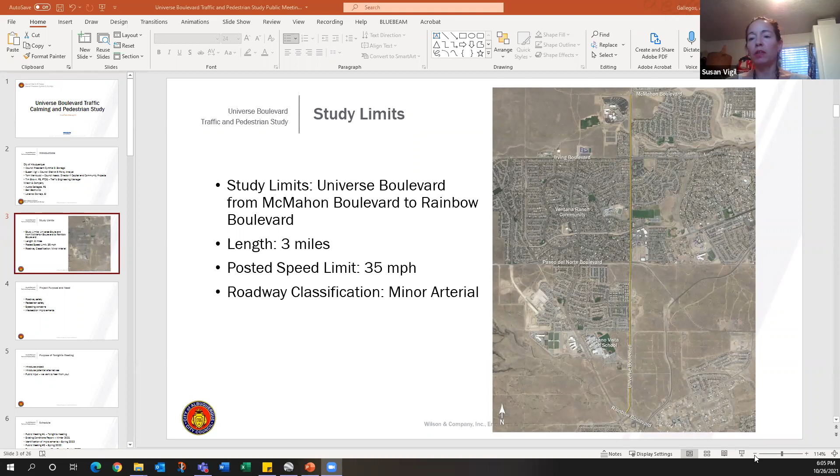I was just going to add that the councilor has been working in this area for her whole term so far, trying to find the right solutions and working with the communities, and so a couple of things have come about, but I'm sure that the engineering team from Wilson and Company will fine tune any solutions. So thank you all.

Right, thank you, Susan. The presentation that we have for you tonight is Universe Boulevard, and it is a traffic calming and pedestrian safety study. The limits are from McMahon to the north to Rainbow to the south, and it's about 3 miles long. The posted speed limit in this area is 35 miles per hour, and it is a minor arterial. One thing I do want to note is that the intersection of Paseo del Norte will not be studied as part of this study, because it is actually currently under a design project. So that's actually being studied as part of that project.

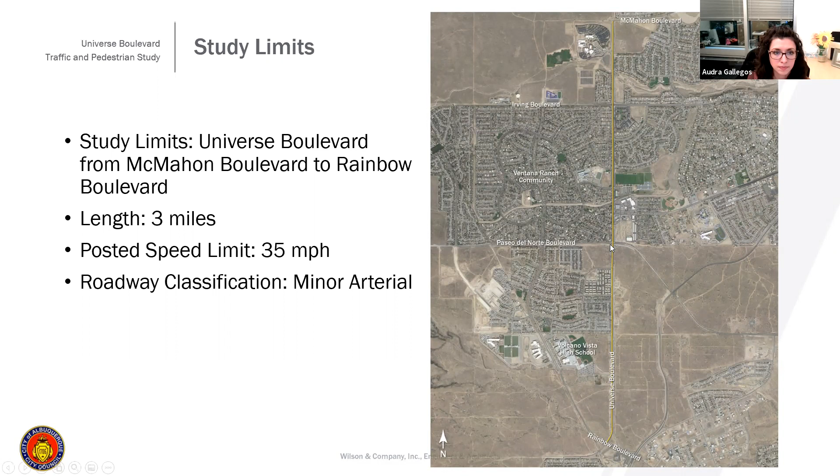So the project purpose and need is roadway and pedestrian safety. There are various speeding concerns, and then we're also going to look at some intersection improvements. The purpose of tonight's meeting is to introduce the project to everyone and any potential alternatives. But the main reason we're having this public meeting is because we want to hear from you all. We do want your input and some of your feedback.

The schedule for the study is public meeting number 1, that's tonight's meeting. We're going to start working on the existing conditions report, which we will be submitting this winter. And then from there, we'll move on to the identification of improvements, looking at any of the potential improvements and analyzing how they operate. We will have a second public meeting in the spring, where we'll present how these alternatives were analyzed. Once we get your feedback, we will provide recommendations and a final report.

So moving on to existing conditions, the section of Universe north of Paseo is a 4-lane section. There's 2 lanes in each direction with a raised median dividing the lanes. There's a sidewalk on the west side and a multi-use path on the east side.

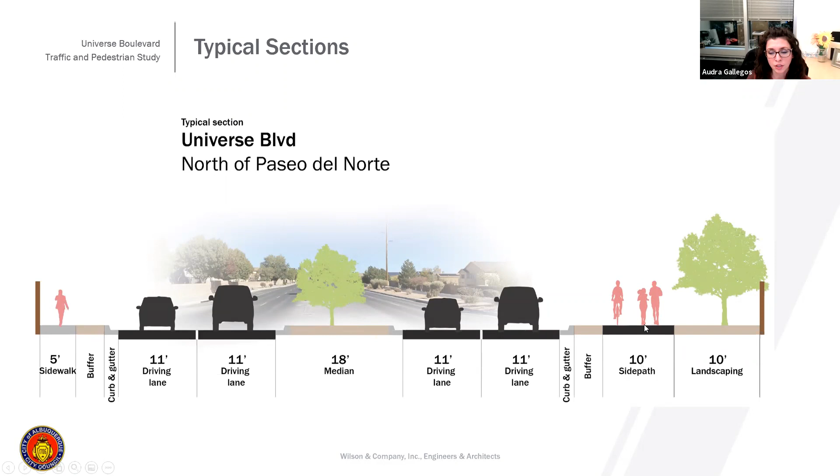South of Paseo, Universe is 2 lanes, 1 lane in each direction, and it's not divided. There's sidewalk on the west side, there's also a bike lane, and then some curb and gutter. And then south of Woodmont, the sidewalk and curb and gutter goes away.

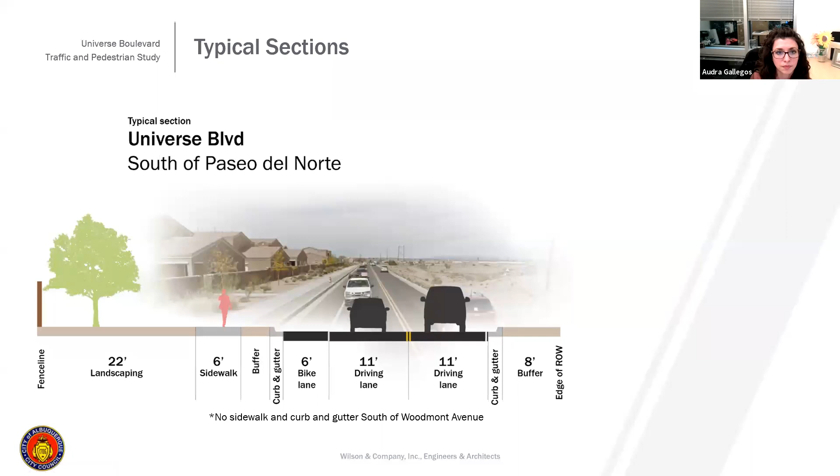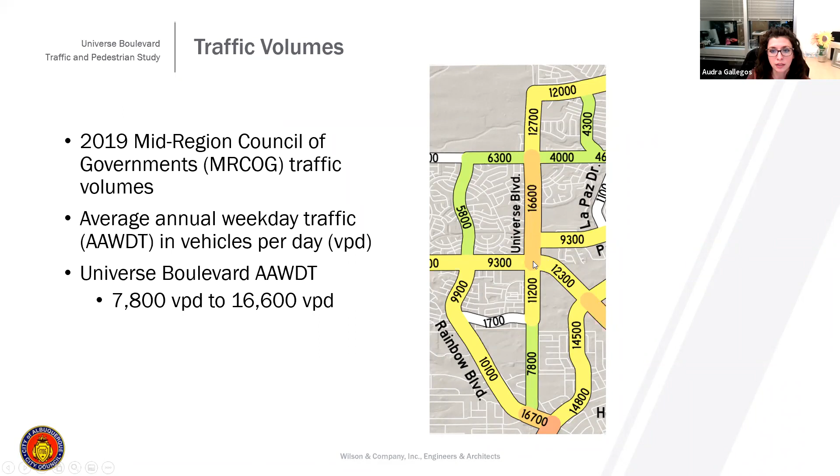So the Mid-Region Council of Governments, they collect traffic volumes throughout the region in Albuquerque. This map shows the average annual weekday traffic volumes, in vehicles per day. Universe ranges from 7,800 vehicles per day near Rainbow, up to 16,600 vehicles per day between Paseo and Irving.

And then I'm going to go through some potential alternatives. I just want to note that these haven't been analyzed yet, and that's the next step we're going to move forward on.

Roundabouts also improve intersection operations. Some of the cons of roundabouts are they're expensive, and they have a larger footprint, so they may require additional right-of-way at those intersections.

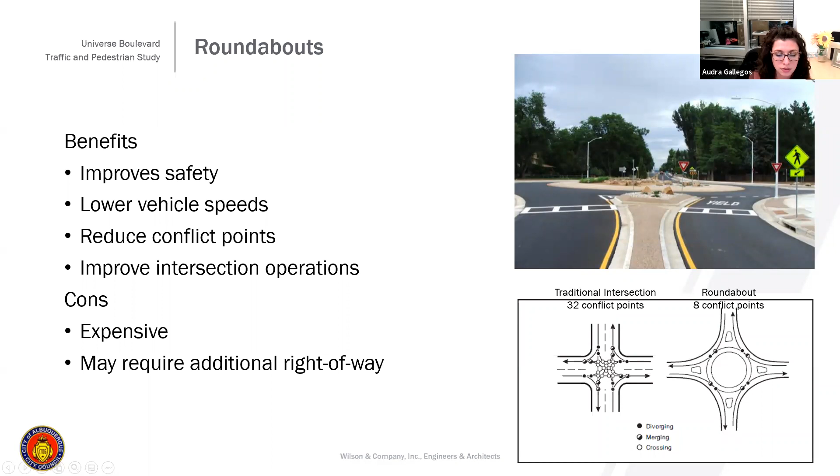So there's 3 intersections we're looking at analyzing. The first one is McMahon to the north, Irving, and Ventana Road. So we'll analyze what a roundabout would look like at these intersections and how they would operate.

The next thing we wanted to look at is possibly adding left turn arrows at signals. There's two types of left turn arrows. There's a protected left turn, where you can only turn left on a green arrow. And then there's a protected-permissive left turn, similar to what you see at Paradise, where you can turn left when the arrow is green, or turn left when you yield to oncoming traffic with just a green light.

These will look at FHWA guidelines to determine if the left turn arrows are warranted. We're looking at 3 locations for these warrants: the first is at the signal of Irving, the next is Ventana Village, and the last is at the Rainbow intersection.

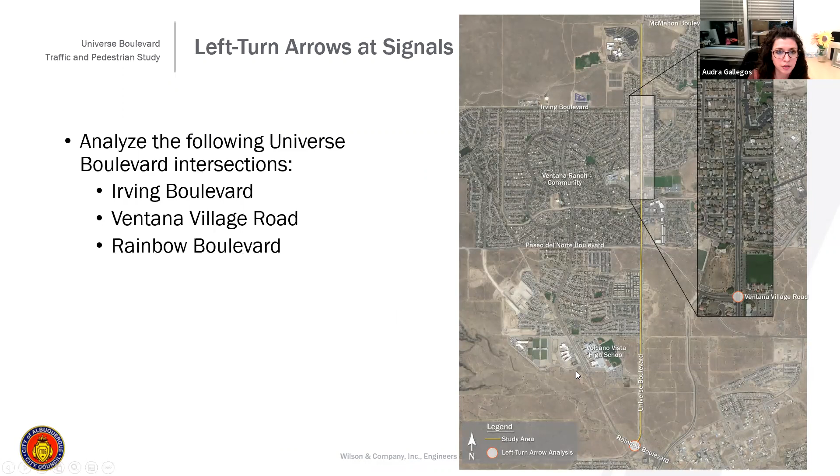The next thing we wanted to look at is an all-way stop warrant at the intersection of Ventana Road and Country Knoll Court. There was an all-way stop here previously, before the Irving signal was installed, but once that signal got installed, this 4-way stop got taken out. So we're going to look at warrants to see if it would be warranted to put it back in. These follow FHWA guidelines, and look at the volumes at this intersection and the crashes that have occurred there.

Recently, Council District 5 funded the installation of flashing intersection beacons. They were installed within the last couple of weeks, so many of you have probably already seen them, on Universe. When a vehicle enters Universe from Ventana Road or Country Knoll, this triggers those flashing beacons to start flashing, so cars approaching the intersection realize there's a potential of cars crossing on Ventana or Country Knoll Court.

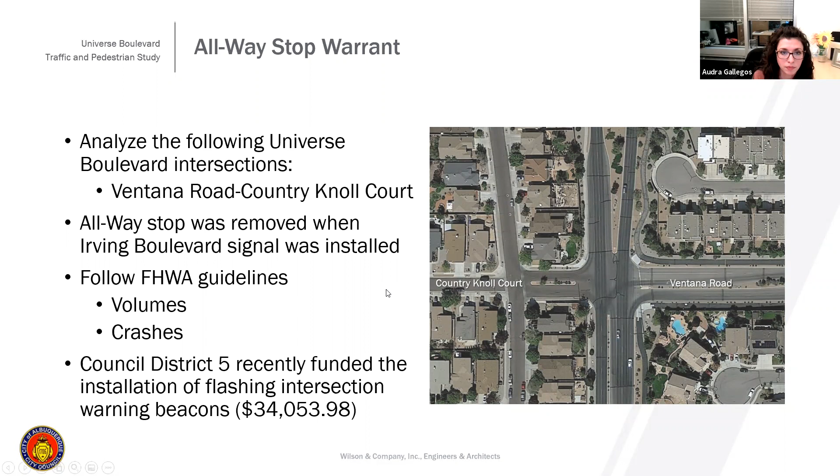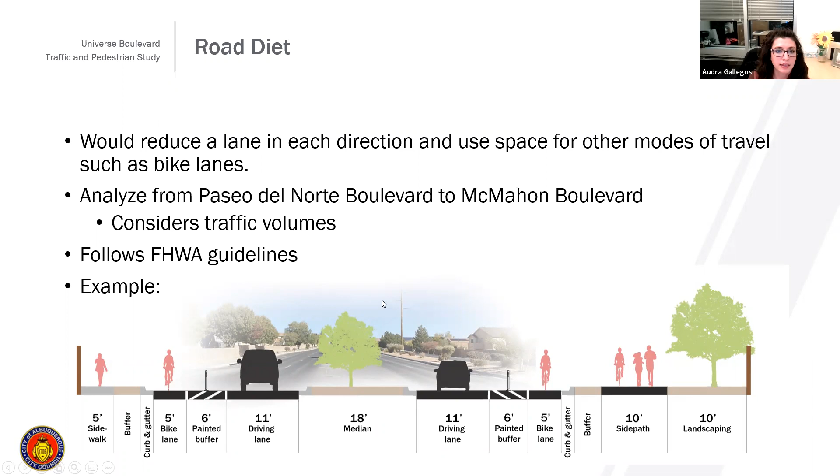This shows an example of what it could look like. Instead of having the 2 lanes, we would have a bike lane and a potential buffer, with maybe some channelization to separate traffic on each side. We analyze the road diet to make sure Universe would operate properly with that lane reduction, looking at traffic volumes.

These also follow FHWA guidelines. Other analyses we wanted to look at include any sight distance issues along Universe at the intersections, ADA compliance, and pedestrian connectivity. There's a ton of pedestrians that run in the morning, walk their dogs, walk to school, walk to the park, so we want to make sure they have safe connections.

We also look at crash analysis, reviewing the latest 5 years of crashes that have occurred along the corridor. The last thing we want to look at is doing a speed study, to determine how fast vehicles are traveling on Universe.

So the next steps for this project: we are in the beginning stages, working on data collection right now. We are getting intersection turning movement counts, which look at traffic and pedestrian volumes at the intersections. We've also set up tube counts — if you see little black tubes crossing the roadway, that's what these are — and they collect volume, speed, and classification of vehicles.

We're also working on getting all the police reports for the crashes that have occurred along the corridor.

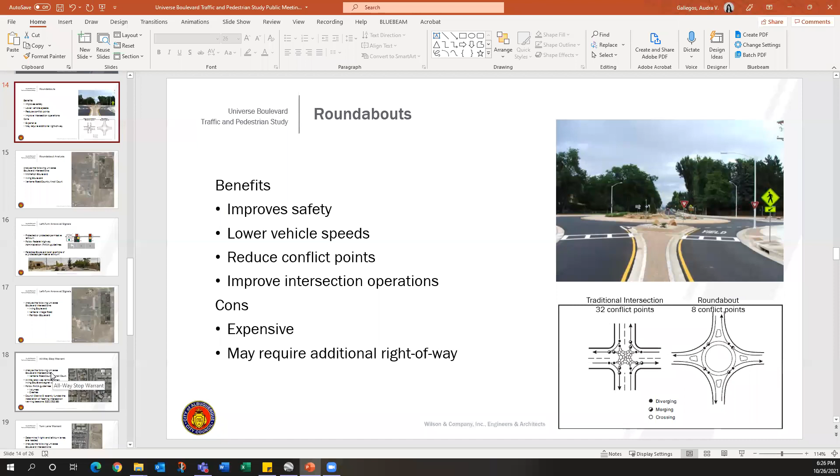Another question: you said you'd be looking into ADA, like your sample photo where Paradise T-bones with Universe. Was that not considered when it was first put in, that it would be there? Is the main concern that it's not 36 inches from the wall to the traffic light?

Yeah, so that's something we'd be looking into. The standards have changed throughout the years for ADA compliance, so we just want to make sure everything is up to current standards. I know the changes too, because I do signage for buildings, and yes, it's changing almost every other year.

Yeah, the road diet - I don't know, once your study sees that, with a count of 16,000 or whatever for this section, dieting and cutting back on that road traffic could be disastrous, just because of the amount of flow that's there.

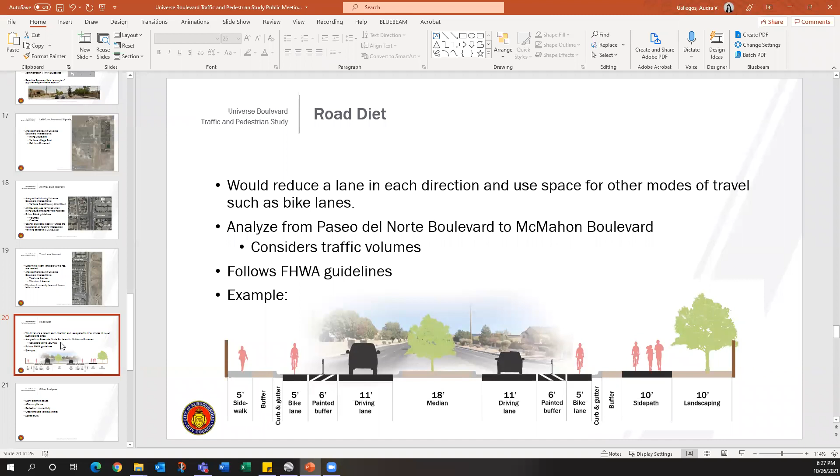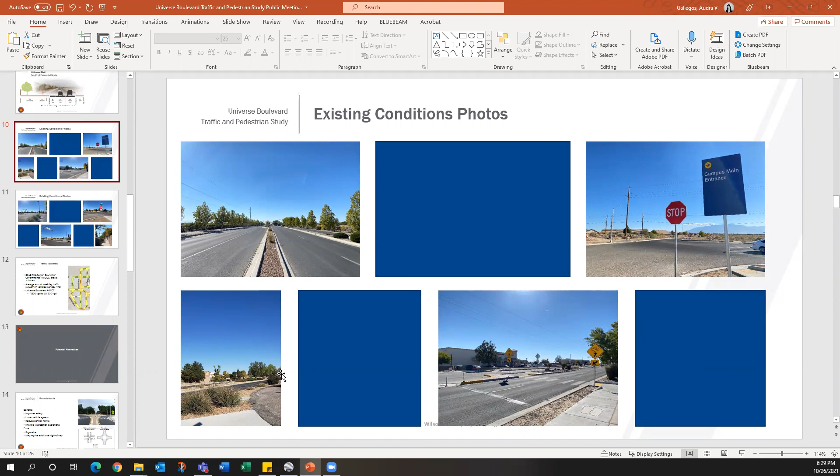We have done everything that is compliant that has been asked of the HOA to maintain. I'm curious about what the study says about sight lines at that intersection, because we've cut back all the way to the turning lane to start on that. But as others have stated, you're not going to stop the speeders. Unless you're putting in ramps and pop-up stop signs or poles, that's going to be the main issue. Speeders will speed no matter what goes on and what is put in throughout these roads.

I will say thank you for the turning lanes and turning arrows. The light at the park definitely needs a turning arrow. Yeah, and we'll analyze that, and that'll definitely be in our report.

And that same photo, the same page you have up right now, any idea what the main concern is with that intersection there with the stop sign and the entrance? Most of the traffic is at McMahon. So what's happening at this intersection is the heavy movement is the left turn movement from McMahon to Universe. So we're going to analyze how a roundabout would operate at this intersection to see if it'll operate a little more smoothly.

Why would that be needed, given that CNM's gates are closed, so nobody should be driving straight? The right hand, where that big pole is blocked off, there's no development right there now. Yeah, so CNM's gates are open during the week when school's in session. So it's just the traffic, and I've heard that since that left turn movement is so heavy, they don't always stop for the traffic, because it's more rare that there's someone coming out from CNM. From that exit, yeah, they all exit out of the main front exit over there. So then they'll disregard it.

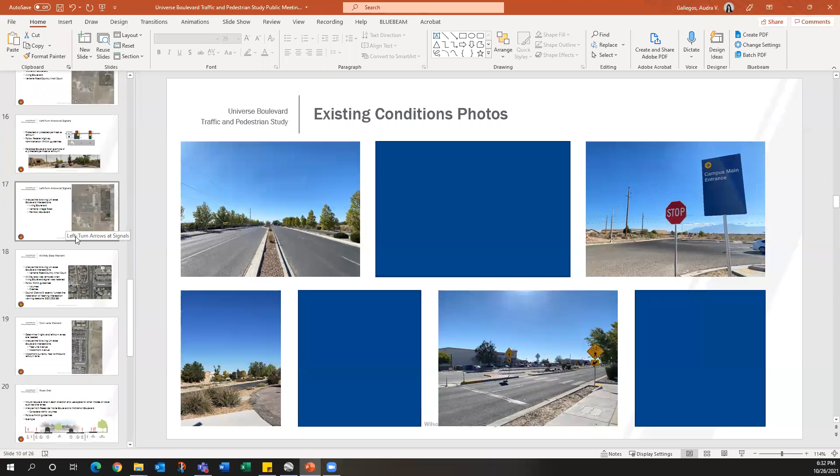That'd be interesting to have a four-way stop put back and rumble strips added. That'd be nice - a four-way stop south of Paseo? No, the main one that had the all-stop. Oh okay, with rumble strips. That would actually be really good too, warning the drivers coming across it.

Oh, I do have a question for curiosity's sake - how many people are attending tonight? There's 12 attendees, not counting the presenters. Correct, not counting the presenters. Oh man, we were hoping for more - or I was hoping for more attendees. Thank you, Ms. Gallegos. Yes, thank you, you'll probably see more attention with the emails. I'll email more questions or concerns. Yeah, thank you, that would be great. Thank you. Okay.

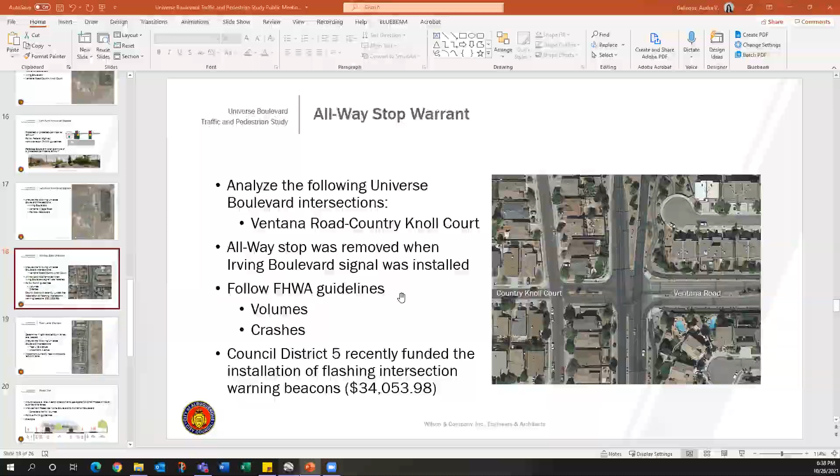Also, I'm a little concerned because I hear there's a Dion's and a Dutch Brothers going up by the Speedway, and I'm afraid of more traffic in that area that it really can't handle.

Yeah, in that field there. I knew the Dion's was going up, I hadn't heard about the Dutch Brothers. So I hear a Dutch Brothers possibly in that little area right there. I actually live on Tapatio Street, just to your left, across from Speedway, so I hear all that mess going on all the time.

A lot of it's these kids that are going to the parks and stuff, which is a good thing, playing basketball, but also they're tearing out of there, and basically there's drag racing going on that road.